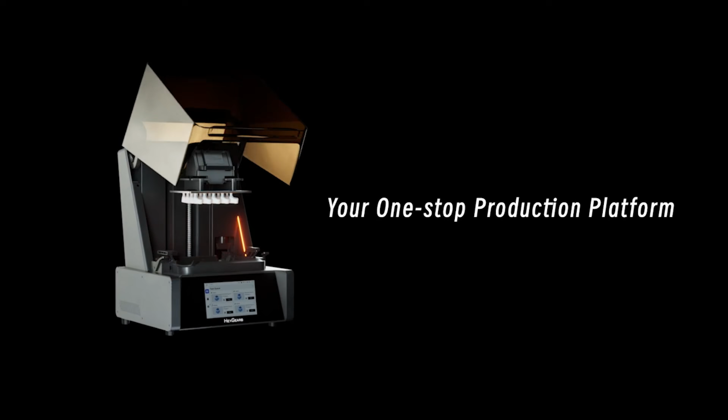I was wrong. The HeyGears UltraCraft Reflex has become one of my go-to printers.

Since my last video, the team at HeyGears have been working behind the scenes for some really exciting updates, and that's what I want to talk about today. We have new software upgrades, a completely new resin lineup, an innovative pulse release system that claims not only to speed up prints, but also increase reliability and reduce component wear, and finally, price changes too. So how do all these new changes play out, and how do they affect you?

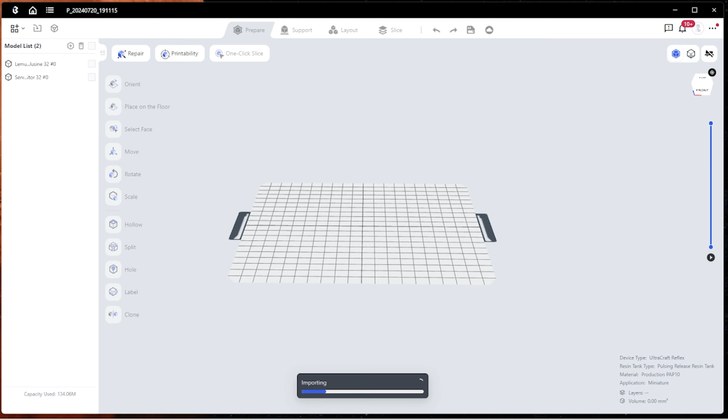Then this dropped. Blueprint Studio version 2 beta, or something like that anyway. It's about as exciting as software upgrades get. Functionally, it remains the same. It still produces well-supported models with fine supports that, in my opinion at least, outperform market leaders like Chitubox and Lychee. You still have the one-click option to orientate, support and slice models in, you guessed it, one click.

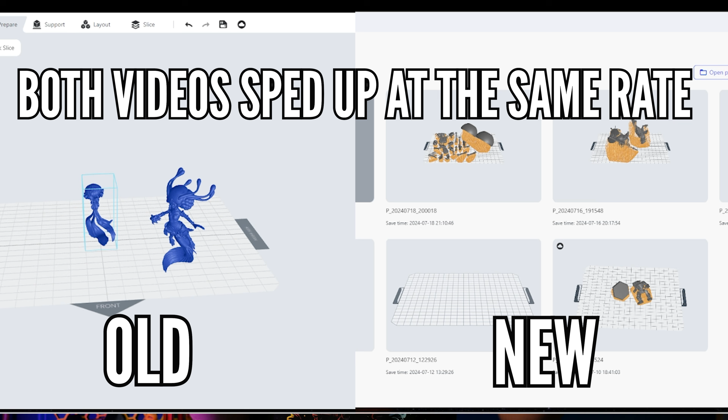But in reality, as a tool, it's a significant upgrade, mainly due to the speed of the software. Everything's faster now, and apparently that's all due to a complete rebuild of kernels, or whatever that means. For a layman like me, it means when I click buttons, things happen faster. And I like that. It means I can switch the thing on, drop a model in, click one button, and have a file that's ready to print.

And this is an important point. I'm not an expert with 3D software. Don't get me wrong, a major part of this channel is finding interesting things to talk about and diving right in and really getting into the weeds of this sort of stuff. But I've also got to be sensible and balance my normal life too. I've got 2 kids, I run a business, I have a YouTube channel to edit and all the rest of it, as well as all the general admin that goes with being a grown-up these days. And so I have to be sensible and ration out my time, because at the end of the day my hobby is not actually 3D printing, it's painting models. And the less barriers in the way of that, the better.

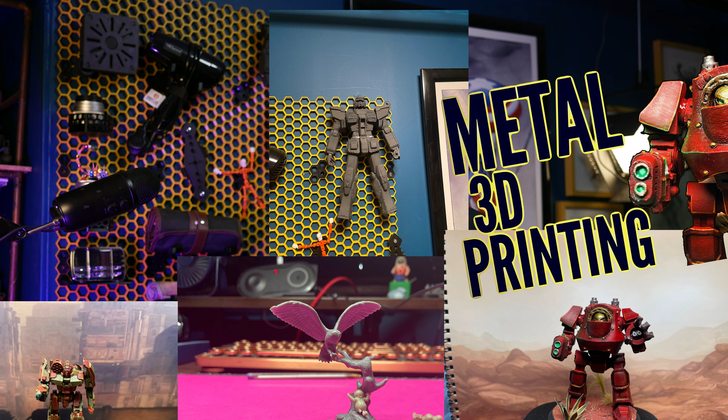So now it gets a bit sexy. Let's talk about the resin range. Material science is one of the many topics that really floats my boat. So I thought we'd go into a little bit more detail about the entire HeyGears resin range, and you can tell me if that's interesting or not. For me, finding new ways to use my 3D printer to make cool stuff is one of the most exciting things about having a 3D printer. And so the Reflex system opened up a whole new frontier of options for me.

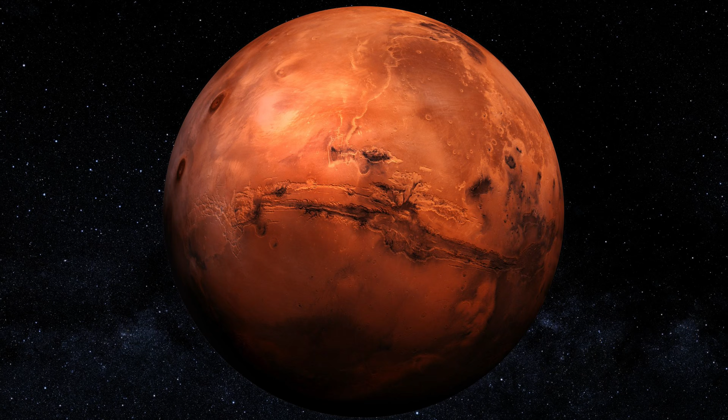But it also opened my eyes to just how expensive some of these resins can be. So when I made my Reflex video last time around, the range of resins consisted of PAT, PAU, PAP, and PAM10 resins. And since then, they've added PARP, PAC, PAWR, and PAH10 resins. They're all a little different, and some are dramatically different than others. But I think the most relevant change for you guys is the PARP resin. And I'm going to get to that in a little bit, because I've seen the PARP resins available for as little as $24.99 a litre, and even when they're on full price, they're $47.99 a litre, which bring the whole pricing system of the Reflex resins into the consumer territory for the first time.

And that's cool. To put that in context, it's about the same price as Faux Hammer's Wargamer resins.

And I think this deals with one of the major flaws of the system so far, which is affordability. But forget about that for a moment. Let's talk about the actual resins and what you use them for.

So PAM10 is a CMYK and white colour mixing system. You can mix all the colours together to make any colour you like, and they all behave consistently with the same material properties. I featured this last time in my video when I made this incredible Evangelion bust, and just look at the tolerances on this thing. It is phenomenal. So this resin is cool, but it costs £95 a litre, and don't forget you're going to need 5 litres as a minimum to get your CMYK plus white. So it's certainly not cheap.

And this is not a resin to neglect PPE on either. Seriously, this is like open it, take a sniff, get a headache level of chemicals. I don't even begin to use this, don't even open the bottles unless I've got my full extraction system and all my masks and gloves and all the rest on. Seriously, you really shouldn't mess with this sort of stuff.

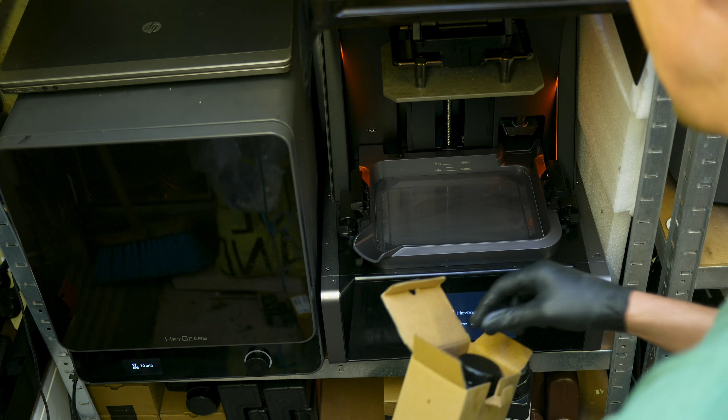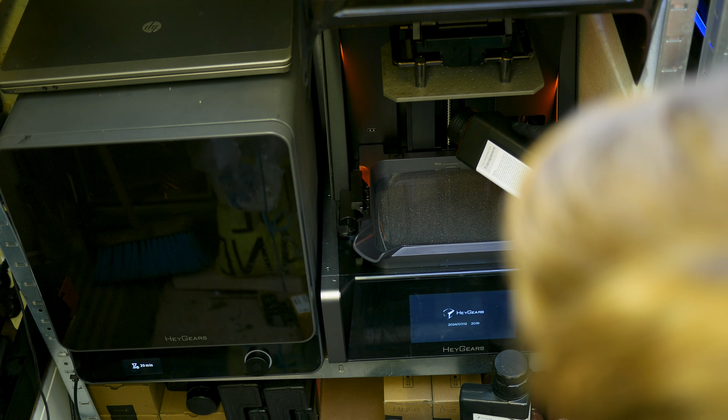So that's PAM10. PAT10 is probably the simplest to explain. PAT10 is transparent. It avoids yellowing, and it's cool for special effects such as visors, cockpits, or even better, force fields. Nice. A quick tip when you're using this though, let the air escape from the vat first.

This shield was printed with loads of bubbles in the resin vat, and this one day later, and you can see the difference. Much like the PAM10 though, this one costs £95 a litre and it stinks. It's easy enough to clean up though with just isopropyl alcohol and all the rest of it.

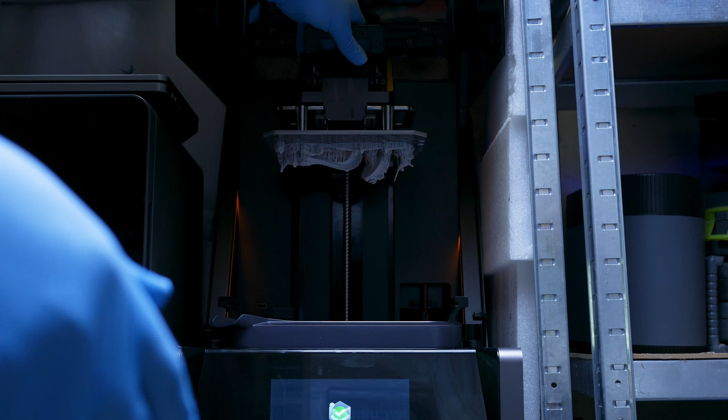Pack 10 is another one from the original range and it's what I've used most. It's their high quality, high detail resin and it's calibrated as such. The Pack resin's for when you really want to get fine details. It's arguable whether you need this for minis, but for when you do need to hammer home that extra resolution, this is your puppy.

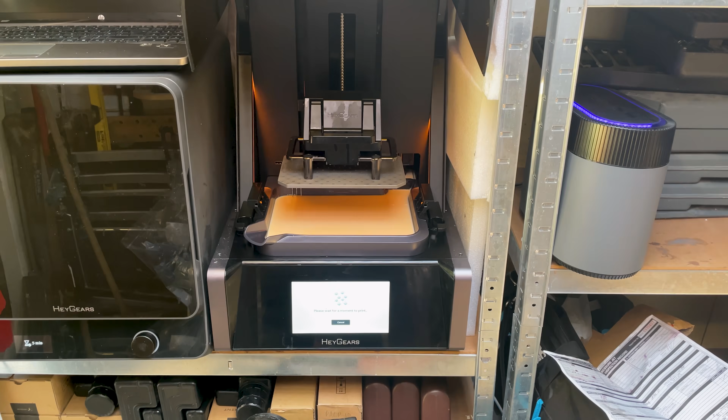Now, the most relevant for anyone who's interested in printing miniatures is going to be the Parp 10 resin. But before we get there, I want to talk about two specialist resins. There's PAWR10, which is a wear-resistant resin, specifically for things that need lots of handling or lots of abrasion. This could be minis, but probably not, because by the time you put any paint on a miniature, obviously the paint's going to rub off long before the resin does. So it sort of negates the point a little bit, you know?

No, it's more for stuff like this ball-jointed figure, which will require lots of manipulation and moving and lots of handling, so it needs to be a little bit tougher. The other thing the marketing about this resin says is that you can't see layer lines from 20 centimeters away. And that's true, you can't. So that's nice. It's got a really smooth surface that's as hard as car paint. So I can already see a couple of uses for this type of resin, and this is available at £70 a litre.

The second of those specialist resins is PAU 10, or POW 10. This is another £70 a litre resin, and the one I was quite excited about. It's an ABS-like resin, so it's strong and it's flexible. The marketing blurb says it's good for making items that need greater strength, like self-tapping screws, and I thought this was really exciting because I'm a nerd. So I printed some, and I can confirm they do print nice screws, but I couldn't quite get them to perform very well, and certainly nowhere near the same level as regular metal screws.

I did talk to the Heygears support team about this, and they came up with a couple of suggestions. They suggested the reason it was a little more brittle was because I over-cured, so I'm running off a second batch as we speak and we're going to test that. If you're interested in finding out about that, I'll update it on my Discord.

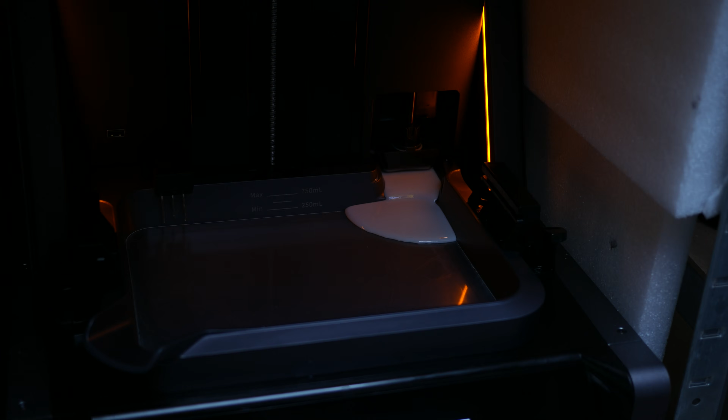The resin I really think you should pay attention to is PARP 10, because it signifies an entirely new direction for Heygears, one that sees them really focusing in on the miniatures market, and I think that's important. Not only is the new resin aggressively priced at £47.99 a litre, but combined with all the other little upgrades and lifestyle choices that make this printer so fantastic, it shows Heygears is prepared to put its money where its mouth is in its commitment to this sector of the hobby.

But there's no getting around it - £47.99, although comparable to other expensive resins like Wargamer, is still at the higher end of the market. But for Heygears, it's the lower end of their market. In fact, they actually call this resin a prototyping resin.

Seriously, look at these models, the level of detail is incredible. I've not done any surface prep at all, just torn them straight off the models, and yeah, really cool. I know there are other resins in the pipeline as well, so watch this space. I am very excited to see what happens next, and it's one of the reasons Heygears has become my go-to printer of late.

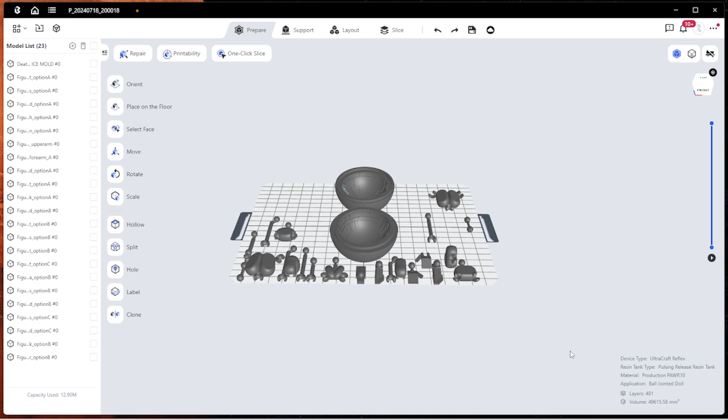The main reason is I no longer need to think about all the settings and other bits and pieces that go along with resin 3D printing. I just drop a cartridge into the back of the machine, drop my model into Blueprint, click one-click slice, and then send it to the printer. I know every time I'm going to get a model that looks fantastic, that's properly supported, and that's what I'm after at the end of the day. It just saves me so much time and, most importantly, brain space. So when I need something that just works, the Heygears is my go-to.

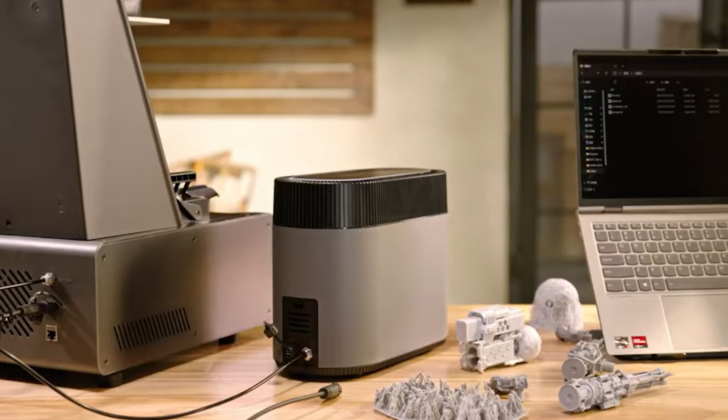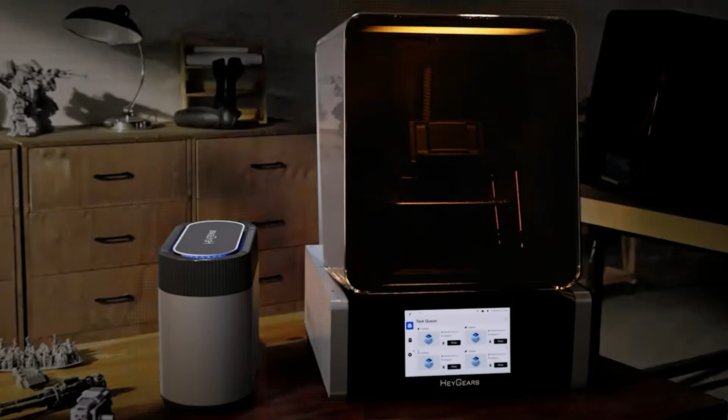Now, this is a feature I really want to talk to you about, because one of the things I really like about this channel is it allows me to explore all the new tech revolving around miniature painting, and this is a really different approach. This is the Heygears pulse release system. What I love most about it is it's a completely new approach to reducing peeling forces. There are loads of different approaches coming to market, so it's an exciting time to be into 3D printing.

The wildly popular Saturn IV and Mars 5 Ultra, which I tested a couple of weeks back, approach this in a different way with a tilting vat, which has its own flaws that I talk about there. Or the Anycubic M7 Pro, which is the fastest next-gen printer I have ever used, which appears to achieve this through sensors and algorithms and witchcraft. And again, I've got an upcoming review of that printer too.

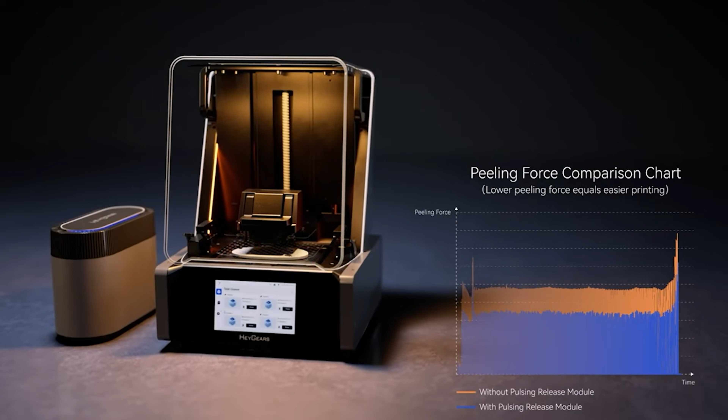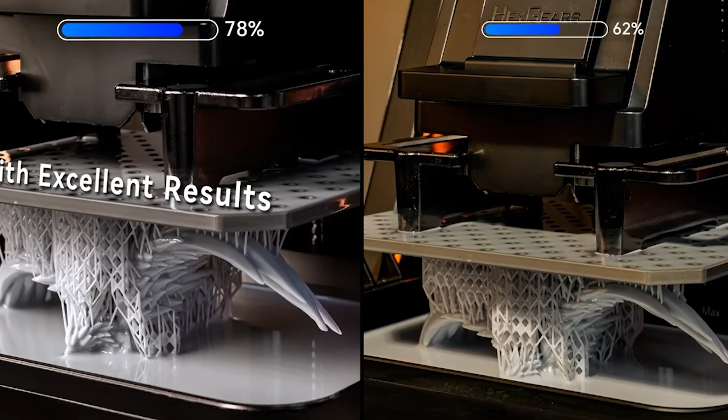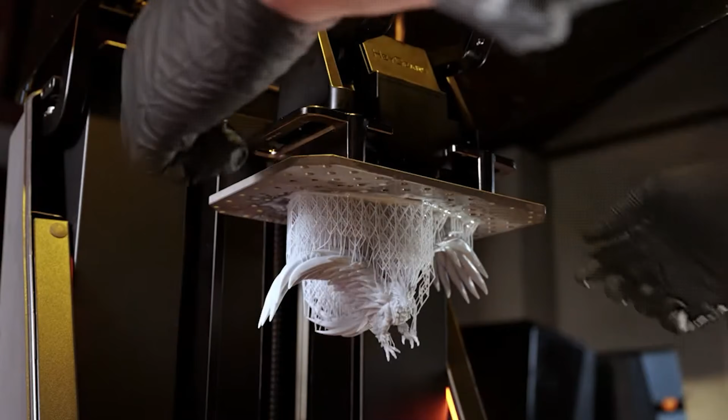But with the Heygears Reflex, it uses the pulse release system, i.e. a small compressor, which when teamed up with a specialised vat, allows the compressor to pump air in between two FEP sheets, causing a bubble which causes the model to peel off and reduce the peeling forces. This not only allows the print to speed up, but also reduces wear on components and supposedly doubles the life of your FEP. Cool. So all those features work, and I'm excited to see what other manufacturers come up with next. There's always some cool innovation going on, and I'm sure there's stuff I'm missing.

I know Formlabs, for example, have a different system too. Who else am I missing? Tell me down in the comments below.

But don't get me wrong here, this piece of kit is not going to be for your typical hobbyist. Cool though it is, it costs £700, which is more than most printers cost on their own. So that's for the compressor itself, but also the new vat you need to run it.

Now I can attest it's faster, but it's not as fast as the new Anycubic, which is the fastest 3D printer I've ever used, nor is it as fast as the new generation of Elegoo Ultras. But I don't think that's the point.

Don't forget, this machine is not aimed at hobbyists, it's aimed at prosumers or smaller professionals. And so the point is to reduce fails and reduce the cost of materials and consumables. The idea being that if you can cut the cost of materials—and it's not quite as simple as this—

but potentially a litre of resin goes from costing £70 a litre to £70 for 1.25 litres, or £56 a litre. Times that by just 10 bottles and you've saved yourself 140 quid. And you can quickly see how in a commercial environment, that makes a lot of sense.

It's hard to justify for a home user though, unless your time is really critical or something like that. Regardless, this is a really cool piece of kit, and I'm excited to see if this gets adopted more widely in the future.

So I made this video because I'm interested in the topic, but also because I wanted another crack at reviewing a printer which has quickly become my go-to, and talking about it because I just love this thing. And I appreciate this whole video sounds like a sales pitch, but genuinely, I want to talk about products on this channel that I use day in, day out, and that are really improving my hobby.